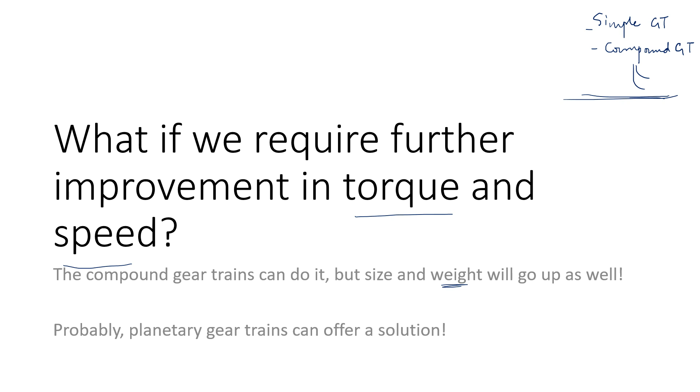So probably there can be alternate ways to achieve these objectives, and that is exactly what we're going to try to explore. There is another alternate approach which is called planetary gear trains or epicyclic gear trains that may potentially offer a solution. Let's try to investigate that.

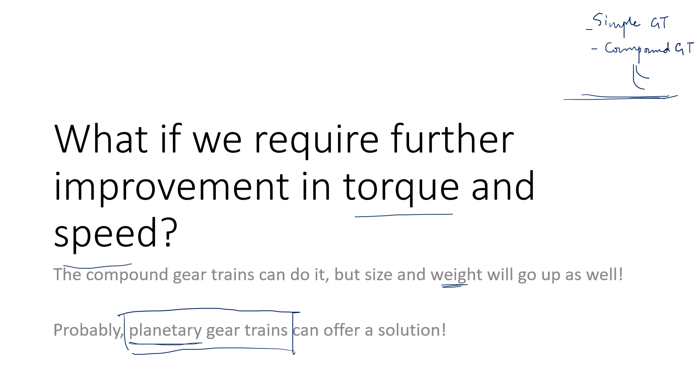So planetary gear trains are needed to be explained. I'll do that explanation pictorially first. Just assume that we have got a conventional gear set. This conventional gear set is quite simple to illustrate. You have gear number 2 and gear number 3 meshed together.

Now what is happening is that you provide the angular velocity to gear number 2, omega in, and it produces an output angular velocity at gear number 3. And that is because gear 2 and 3 both are grounded over here and over here. These pins can have a rotation, but the joints are structured in a sense that this is the ground link, or you can say that actually arm number 1 is the ground link.

So with this realization that you have both the ends of this arm grounded, you can readily identify that omega arm is going to be equal to 0. And that was the underlying condition of simple gear trains and compound gear trains that we have previously discussed.

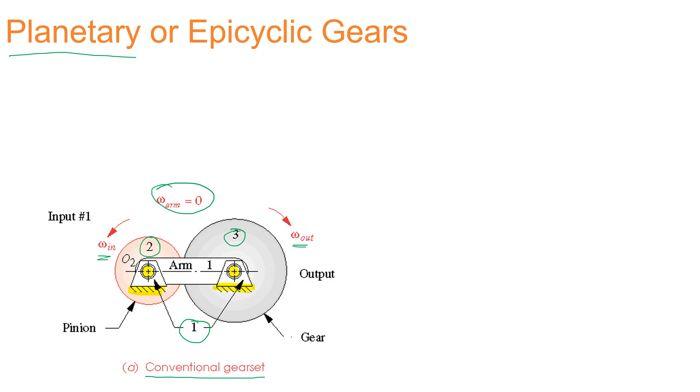But in case of planetary or epicyclic gear trains, what happens is that we lift one condition. So conventional gear set is going to have 1 degree of freedom, but if you remove the ground at gear number 3, you are going to have 2 degrees of freedom. What does that mean? It means that we are going to have this ground link no longer implemented. So when you lift this condition, it is going to have another degree of freedom added, and this was the discussion that we had a few months earlier when we discussed the degrees of freedom.

So when we do that, this is going to be the scenario. And you can obviously make this point from here by observation that this pin is no longer grounded. When you don't have this one grounded, it would mean that now you can have a movement on gear number 3 as well, around gear number 2.

So with this realization that you have now got a bit different structure, we can take one step back and observe what is happening over here. So what happens is that if you provide omega in as the input, the output is going to be generated as omega out, but now you have omega arm no longer equal to 0.

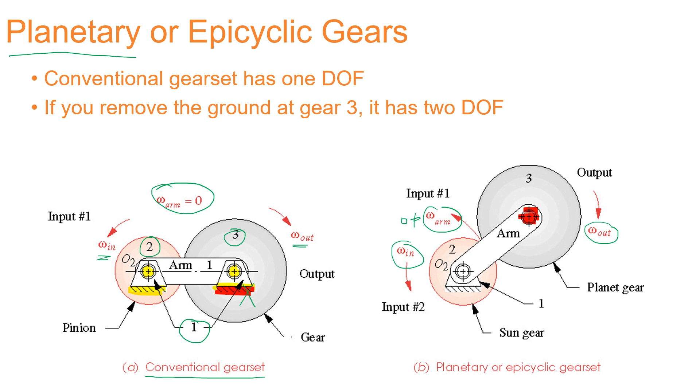When you have that arrangement added, it would mean that you now need to have some modified expression exhibiting the movement. The other thing that you can observe is that gear number 2 is somewhat similar to a sun gear around which a planet is rotating. So that's why we call these kinds of gear sets to be planetary gear sets. You have the sun kind of staying there, and the planet is going to make rounds around it. So this is the reason why we call these to be planetary gears.

But at this particular stage, you can very easily observe what was the difference. From here to here, you have shifted just like you have removed one constraint from the gear sets. And that has opened up quite a few possibilities in the movements.

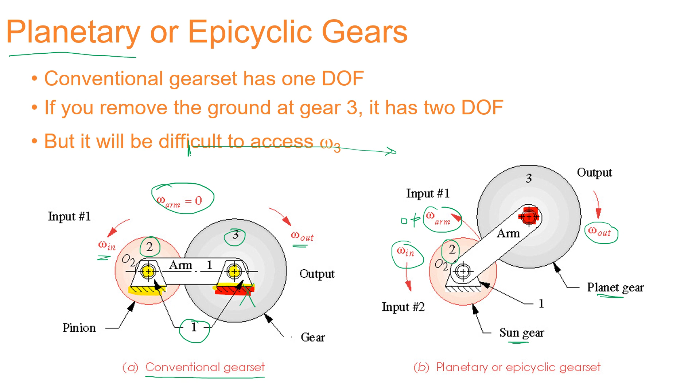The problem we are going to face is that omega-3, which was previously readily available just by observing the gear ratios, is now more difficult to achieve directly because the arm is also going to have a movement. But we can do that, and that's exactly what we are going to achieve in these subsequent slides.

Generally, a planetary gear set is going to have another gear added to it, and that is what we call a ring gear. That's visible here as well.

This is going to make the whole arrangement like this: you have the input given to the sun in terms of angular velocity, and that is going to force the arm to have a movement and the planet to have a movement as well.

It depends on how you have structured the ring gear. If it is stationary, it is going to give you a different scenario, and if it is movable, then it is going to give you another different scenario. But whatever the configuration, the planet is going to have an engagement with the ring, which is going to force the ring to have a movement, or relatively enforce the movement on the planet or on the arm.

That we can take the benefit of. So this is the whole arrangement, that you have got sun, planet, and ring all structured together, assembled together to perform interesting motion.

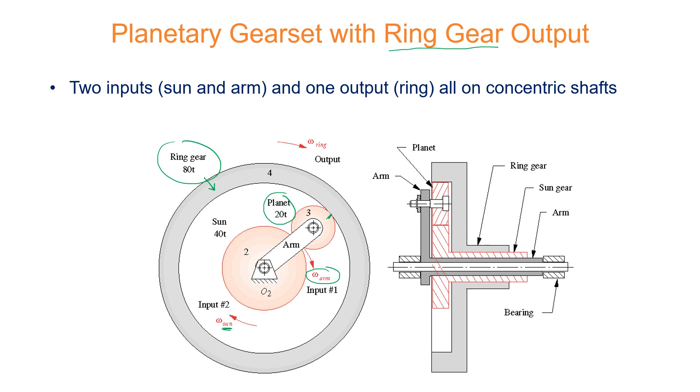I'll momentarily stop myself discussing the mechanism part of the arrangement. I'll just invite you to consider the machine design element.

The one thing that you can readily observe is that you have a shaft, whose center line is indicated here. This shaft needs to be designed in a fashion that it is strong enough to hold the whole assembly together, and especially when torque and force transmission is going to happen, it should be strong enough to provide that structural strength.

Also, you can see the bearing surfaces over here. These bearings are indicated, and they need to be designed in a fashion that they are consistent with the load bearing capacity or the torque capacity of the gear set. Sometimes roller bearings are used, sometimes thrust bearings are used, and sometimes ball bearings are used, depending on what kind of application you are pursuing.

The minute details, although not that extensive, are also very interesting in a sense. Just observe what is happening on this pin.

Now this pin is countersunk. Let me highlight that. That's countersunk in this part. So when you have countersinking, it means you are going to have special machining done in order to achieve that. Let me use a different color to highlight that.

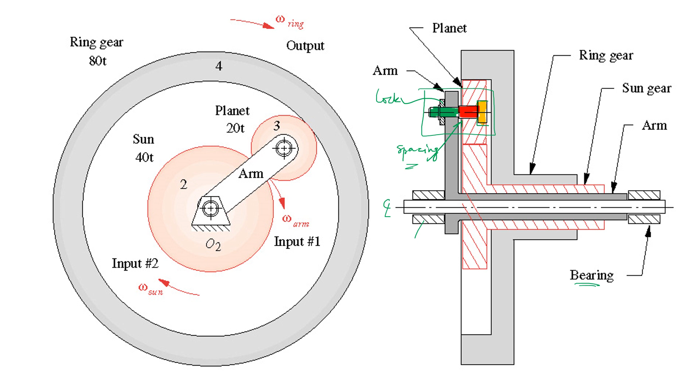So at this particular stage, we said to ourselves that we are going to hold the mechanisms discussion for a while and discuss the machine design elements. The machine design course that you are going to study, or potentially have already studied part of, needs to be correlated over here.

So when you try to achieve this kind of arrangement, it would mean that you provide input to the Sun generally, and you provide output from the ring. Planets are going to allow you to transmit that power from the input side to the output side. And because you have multiple gears, it is going to transfer the power in a much more stable and effective manner.

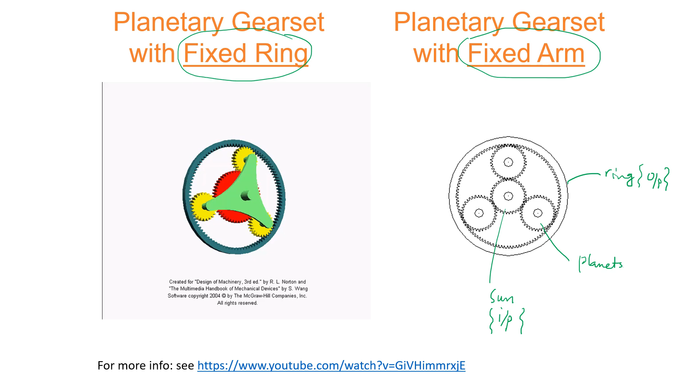In case of fixed ring arrangement on your left, the possibilities are going to be a bit different, achieved when the ring link is grounded. What we have done is have this ring grounded, which means that once you try to move the Sun, the planets are going to rotate about their own axis, but the arm is also going to have a movement. So this is going to be movable, which was not the case in fixed arm.

So these are the two major configurations in which the planetary gear sets can be structured. One in which the ring is going to have a movement, and the other where you have the arm to be movable.

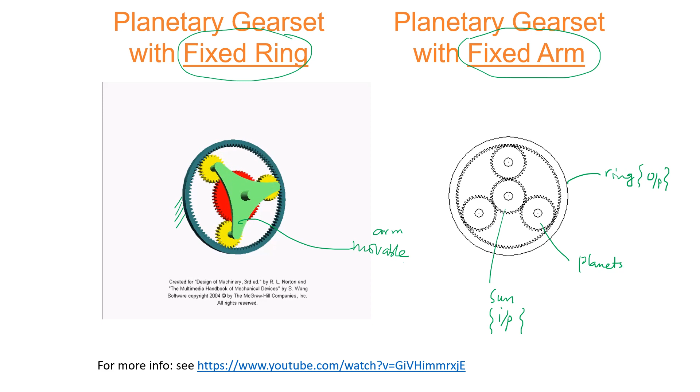As it happens oftentimes, there are multiple different ways the epicyclic configurations can be made, and those are illustrated here. In this scenario, for example, if I just take one out of those, you can readily see that this corresponds to configuration B.

If you observe what is happening here, you need to first realize that there are multiple gears getting engaged with each other, and the nomenclature is of a specific kind. Link number one is going to be the arm always. Link number two, or designation number two, corresponds to the input side of the gear, generally the Sun gear.

3, 4, up to the second last item, these are going to be the planets. The last number is going to correspond to the ring that is already described.

Now, as far as the diagram is concerned, you can see it is just like a line diagram, and it is not going to give you the complete picture. It is just a schematic illustration, shown only above the axis of rotation. You have the axis of symmetry like this, and actually the gears are available on the other side too. We're just observing a truncated schematic view of the planetary gear arrangement.

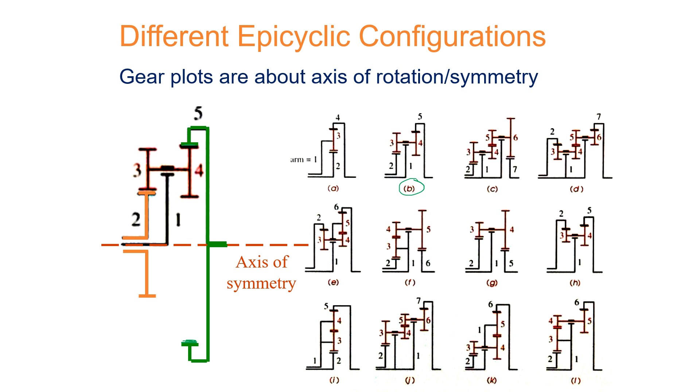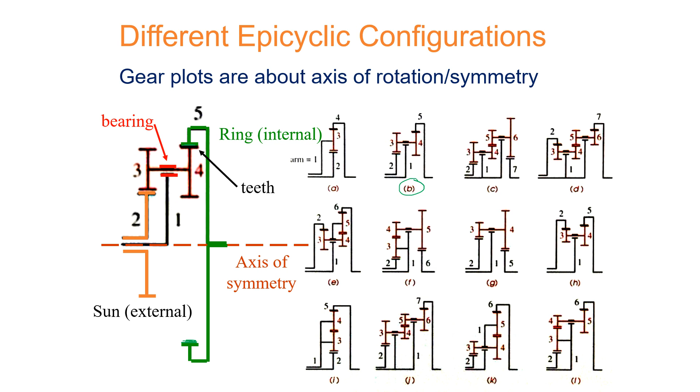So around the axis of symmetry, you are going to have, as shown in green, the ring arranged. The inner side of the ring has the gear tooth profile, engaged with the planetary arrangement labeled 3 to 4. The input is provided to the Sun as highlighted here, and that is mirrored on the other side about the axis of symmetry. The teeth are going to be there, the bearing surface is indicated, and the Sun is going to have a rotation. It has external teeth profiled on the outer periphery, while the ring has internal teeth.

Now you can see one animation being run. All you need to do is observe, out of all the options ranging from A all the way to L, identify which epicyclic gear train this particular animation refers to. I'll give you a minute to observe the animation and realize which one it refers to.

I'm hopeful that you have selected G in this case.

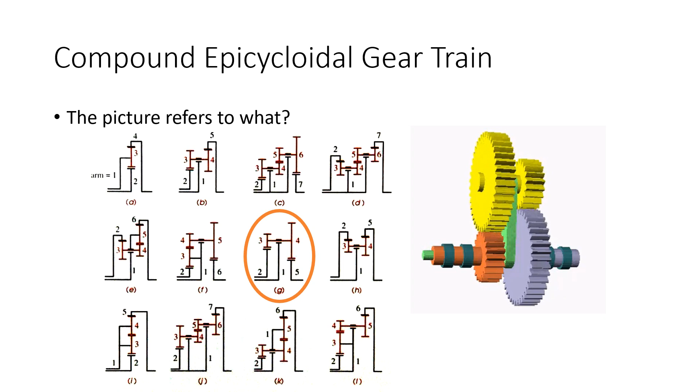As we did for the other mechanisms, we have to perform the kinematic analysis. In this case, we are more concerned about velocities. So the base equation that we are going to use is indicated over here, and this base equation was mentioned when we discussed the velocity kinematics many weeks ago. In that, we said that we are going to make use of a relative velocity expression, and that was defined to be this.

In our case, we're going to choose a gear. This gear is going to have the angular velocity associated with it, computed to be equal to the angular velocity of the arm added with the relative velocity. So this is the base expression.

In terms of computing it for the gear trains, obviously where you are going to have multiple gears, I'm going to list the gears over here, starting from 2, 3, 4, 5, and so on and so forth. I'm going to use a row by row arrangement in order to compute, so this is going to be computed when you add omega arm with the relative term over here.

Once you have computed that, because you're going to start from somewhere from the input side, and the input side is going to have the omega gear given, you can make use of the terms over here in order to find out the unknown. Once you have computed that, you're going to make use of the gear ratios to shift to the second row, and once again through this route to the third row, and so on and so forth. Don't worry, we are going to do that exercise in the next slides.

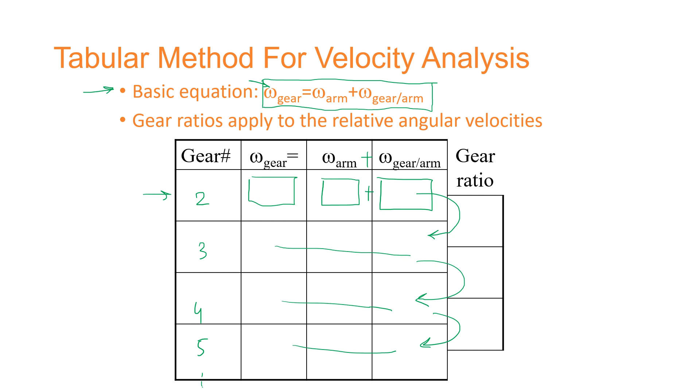Let's do this exercise. What we have been given is that you have a sun gear, and whenever I say sun gear, you should automatically refer to gear number 2 as illustrated over here. Sun gear is going to have 40 teeth, so that's indicated. Planet gear, whenever I say this word, you should automatically refer to gear number 3 on this diagram, and this is going to have 20 teeth associated with it.

The ring gear is also indicated, and since we have already mentioned, this ring gear is going to be numbered 4.

Now on top of that, the number of teeth are given, and even if these are not given, you can always count the number of teeth. If these gears are provided to you for a mechanism, you can always count them. But over here, these are given, available in the data sheet.

Now, what is given, the operational arrangement, is that you are rotating the arm with 200 RPM, which means that omega arm is given as the 200 RPM. It is also given clockwise, and you can see that sense with the arrow indicated this way, that it is actually clockwise. I'm emphasizing the direction over here because this is important now. In case of epicyclic gear trains, it is absolutely necessary that you make sure that the direction is properly taken care of.

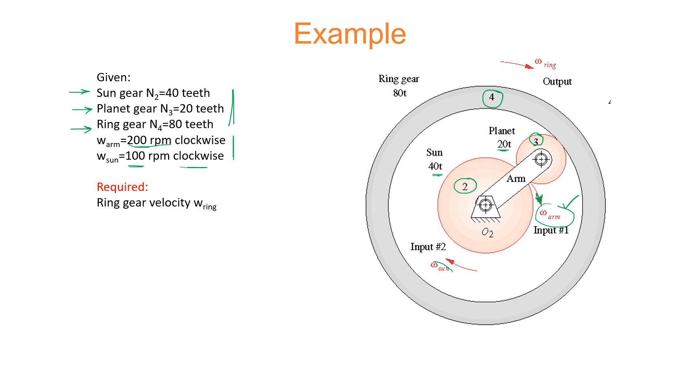So omega arm and omega sun, the angular velocity of the sun, is also given as the input, which is 100 RPM clockwise. So this omega sun is also given. Required is to compute the ring velocity omega ring, for the output, which is link number 4.

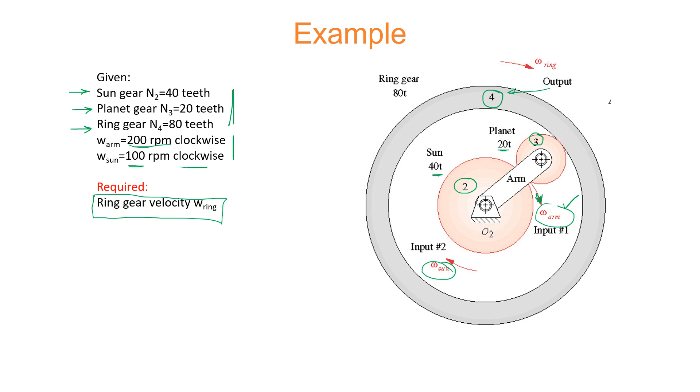With this realization that you are going to use the tabular method that we have introduced in the previous slide, let's perform this exercise.

Now over here you can see the simplistic schematic arrangement of the same arrangement that we have mentioned previously. So this is the same schematic. Now the rest of the stuff is indicated, like n2 to be 40, n3 to be 20, and n4 to be 80, and omega arm, which is going to remain constant because it is the input given to the system.

And since clockwise has been taken to be a negative convention, this is going to be minus 200 RPM. So when I use this minus 200 RPM for omega arm, this is going to remain constant throughout, as is indicated in this column.

Now omega sun is going to be the angular velocity given to input gear number 2, so that is the only remaining value available in this row, and that's exactly what we write down, minus 100. Since in the equation you have 2 knowns and 1 unknown, you can readily compute that minus 100 is going to be equal to minus 200 plus 100 with a positive sign, and that's the relative angular velocity of the gear with respect to the arm.

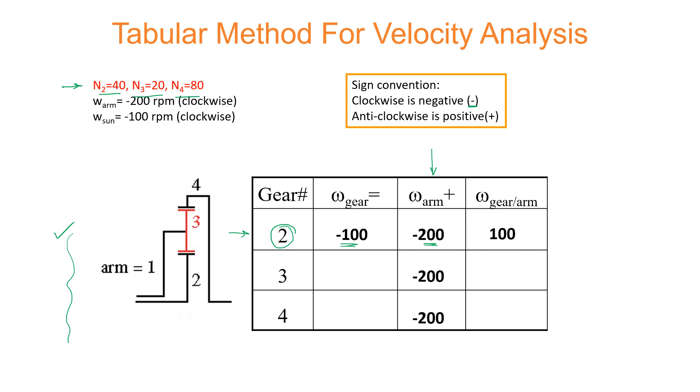That can be filled in this table very easily. Now since you have all the relevant terms in row number 2 available, you can jump on to gear number 3. But you cannot really do that directly - you need to make sure you engage the gear ratio between 2 and 3 here, and that's exactly what we have added.

Since you know n2 was equal to 40 and n3 was equal to 20, this is what we have mentioned, minus 40 by 20. Why is there this minus? Because it is going to have a change in direction. That's why it is minus.

So once you do that, you can fill the values in row number 3, and that's what we have done. This is going to be when omega gear with respect to arm is given, you can use this expression of omega gear, and this gives you minus 200 as the answer, because this ratio is going to be equal to minus 2. So from here to here, you multiply with minus 2 and you get minus 200.

Once you have this minus 200 added with minus 200, you can find out the omega of gear 3, and that is going to be minus 400. So you can now see that when you provide minus 100 to the sun, the planet is going to rotate much faster, 4 times faster. So this is minus 400 corresponding to that.

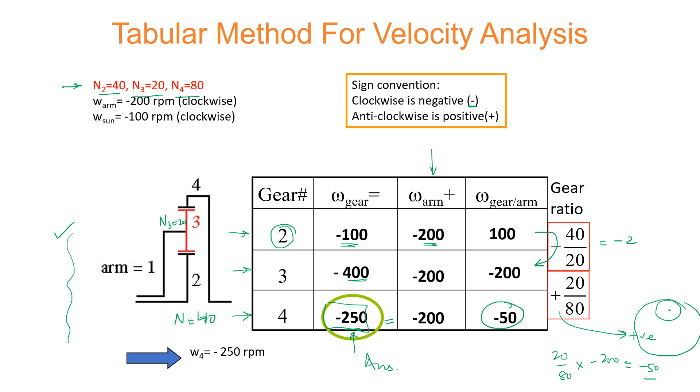Let's quickly do that for another arrangement. Now this is an arrangement where you have the arm here, sun here, this is the planet, and this planet through the bearing is connected with the ring number 5 here. With this data given: N2 is 40, N3 is 20, N4 is 30, and N5 is 90, you can do the similar exercise.

The omega arm is given to be clockwise 100 RPM, and omega sun is given to be counterclockwise with 200 RPM. With this realization that you have this assembly to be investigated for velocity analysis, if we plug in all these values, these are going to be the corresponding answers.

So the omega arm value given is going to remain fixed throughout this column. When you are given omega sun to be 200, you're going to make use of this value added with this, equated with the addition of these two. So this is automatically going to be accounted for.

Once that has been taken care of, you can make use of the gear ratios to construct this value. Once this value is given, you can readily find out the remaining expressions. Since this is the connecting shaft connecting 3 and 4 together, this gear ratio is going to be equal to 1. So you can construct this value similarly, and jump from this to this to find out minus 300, which means the ring is going to have a rotation of 300 rpm in the clockwise direction.

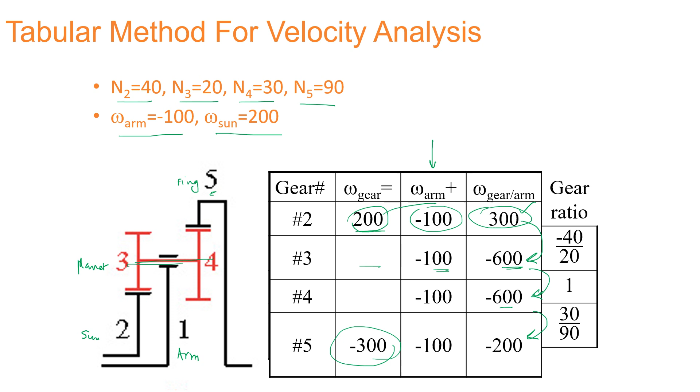Although I'll prefer the tabular method, alternatively you can use the formula method, which is quite simple. This is the formula which says that the angular velocity of the output gear minus the angular velocity of the arm, divided by omega in minus omega arm.

Omega in is going to be provided to the sun. In terms of ratio, it's going to be equal to the product of driver gears and product of driven gears. So when you compute that using the data given in the previous example, this is going to be your answer.

Omega out needs to be computed; omega arm is already given, omega sun is already given, and the gear ratios in terms of number of teeth are also given in these arrangements. When you plug in these values, you can automatically see that minus 300 is achieved once again.

Which means the ring is going to have a rotation, rotating in the clockwise direction, with 300 rpm.

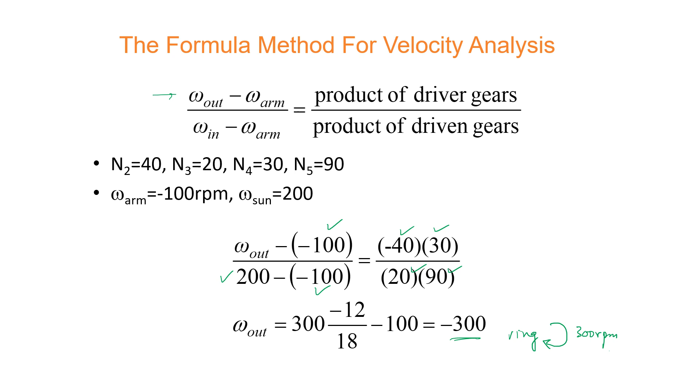So I'll raise this question again: is this it? No, this is not. Actually, we have just covered the basics, although we have all the necessary tools to understand the working of geared mechanisms and how to construct them together in simple gear trains, compound gear trains, and epicyclic gear trains. But you need to explore on your own quite a few other topics that we were unable to discuss in class because of shortage of time.

A few candidates can be observing automatic transmissions and differential wheel assemblies, which can be a good interesting read. Different automatons or precision watches, you can see what are the internal mechanisms that are generally geared mechanisms. Observing those is going to give you quite an in-depth understanding of the vocabulary that we have established over here.

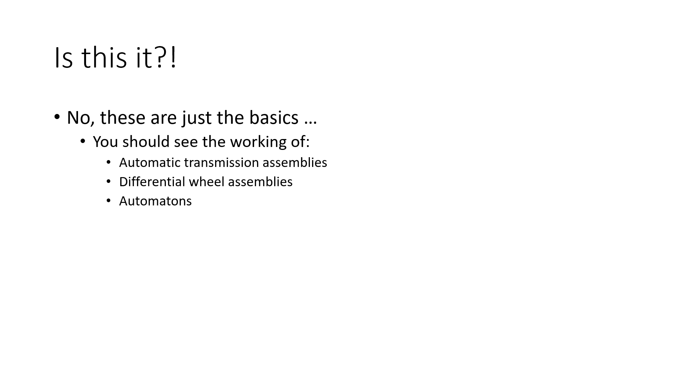I should also emphasize that our very own lab, the human-centered robotics lab, is developing collaborative robots, or generally called cobots. In that, we have a 7 degrees of freedom robot being developed. Each degree of freedom is actually a very complex, flexible joint, and in that flexible joint you have a motor, generally a frameless motor.

You have a few sensors, you have the control circuitry of it, and on top of that, you have a harmonic drive, or generally strain wave gears, added to it in order to achieve much more higher robust gear ratios. On top of that, quite a few other details are there.

So I think we can call it a day. We have covered the basics in the previous lecture, and we have covered quite all the necessary details that were required corresponding to gear trains today. So I would once again advocate, before I let you go, that you need to go through the exercises and develop this hands-on skill to understand all the nitty-gritty of such mechanisms.